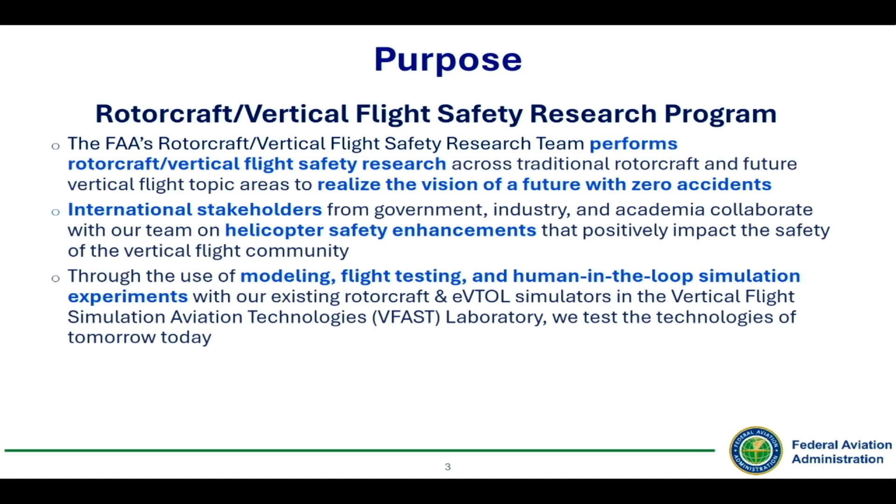We have a vertical flight simulation aviation technologies laboratory where we look at potential safety enhancements for helicopters, working with safety teams like the United States Helicopter Safety Team, the Vertical Aviation Safety Team, and a lot of the VFS working groups. We do all that with an eye toward the future, testing the technologies of tomorrow today. I know that's a little Disney-esque, but it's really the truth. It's really what we do.

This is a roadmap of the research activities we are working on within the FAA, kind of a little bit of history of some of the stuff we've done here, recent history of where we've started, where we plan to go, what we do now, and where we're going in the future.

A lot of our research work, at least since I've been involved, has focused on some of the legacy things, moving things over from the fixed wing community, such as flight data monitoring, vision systems technology, degraded visual environments, and vertiports. We did some studies both in the simulator and in real life, working with the Office of Airports to come up with standards and criteria for the engineering brief EB 105 that the FAA put out.

And sometimes when you do that testing, you find that there are changes you don't want to make. That's just as important a finding as the things you do decide to change.

That moved us into the near-term phase where we're sort of at right now, looking more at virtual reality flight simulation training devices, still doing some work on those other things, but starting to get into areas of more IFR infrastructure, so procedures. We're looking at things like IFR to the surface, as well as reducing loss of control accidents—how do we do that with better automated flight control systems, better technologies for looking at flight regimes and different things.

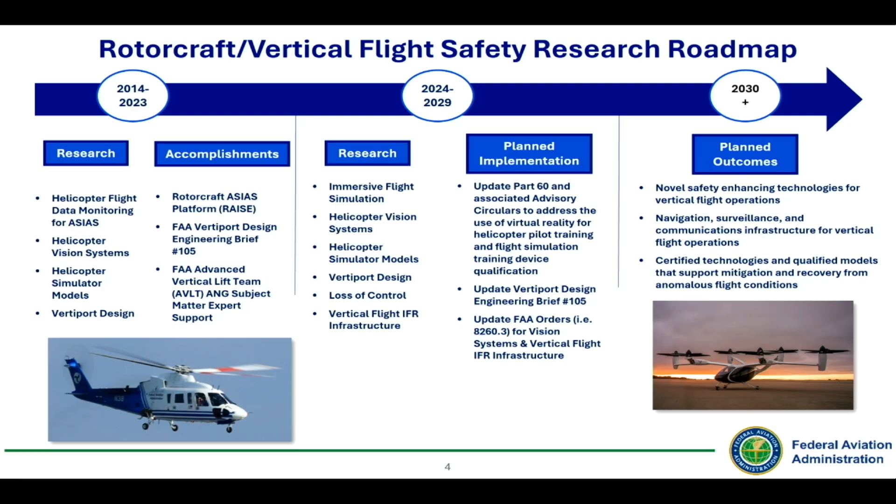Here's another way to look at this, just a sense of current and some legacy projects we've been looking at primarily. In addition to the ones I talked about before, we've also been active on wire strike avoidance, integrated flight and propulsion control, and things of that nature, as well as all the virtual reality and other things we have going on, flight data monitoring, and crash-worthy fuel tanks and other things we have going on at the center.

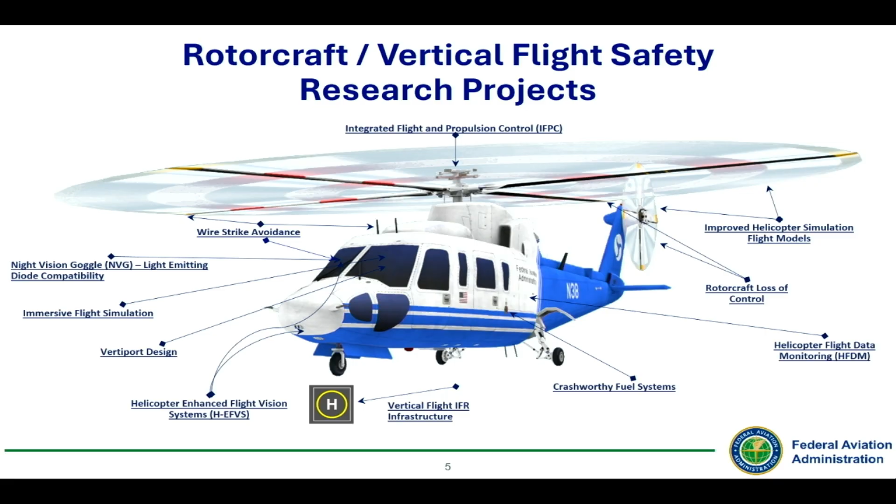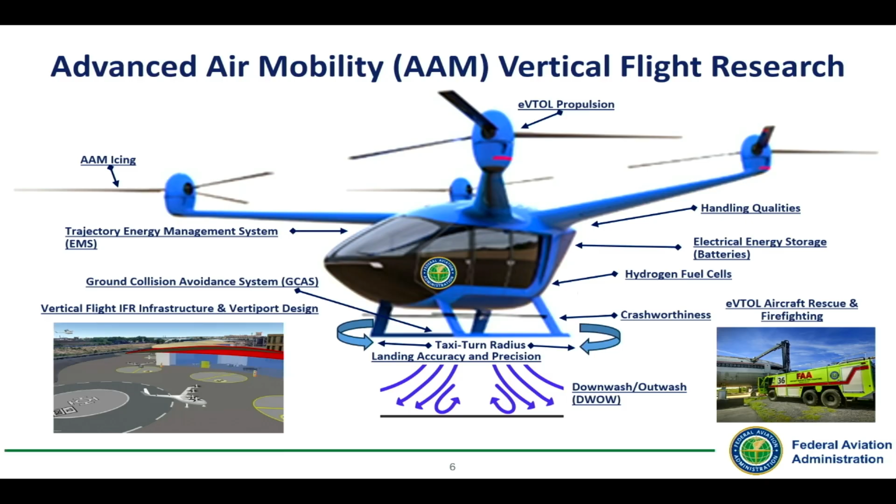On the AAM side, some of the things we've been looking at are relative to the legacy helicopter, but we've also been looking at things like downwash and outwash, landing accuracy, some icing aspects, aircraft rescue and firefighting, and the infrastructure, which is also important. I mentioned before, we don't do this alone—we do this with a number of different partners.

I want to talk briefly about this. I'm sure my colleagues on the panel will probably hit on this more than I will, but the FAA recently announced an eVTOL integration pilot program, and there were 8 sites selected.

There's a number of different sites and partnerships. You can go on the FAA's website as well as the DOT's website. There's more information on there about the EIPPs.

They're just standing up. We've done a number of different partnership programs in the past, dating back to the stuff we've done with the test sites and others. So there's a long legacy of public-private partnership and collaboration. I think this just extends it and operationalizes it as we look towards initial operating capability and the start of commercial operations with some of these platforms.

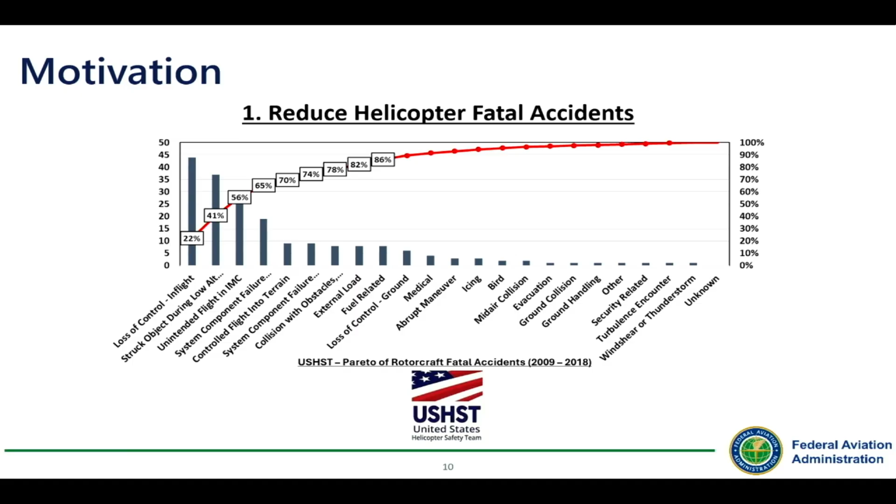Historically, we're trying to prevent helicopter fatal accidents, reducing the fatal accident rate for rotorcraft. This also extends out when we get some of the new entrants flying. We don't want to have accidents there as well. We want to continue to reduce the commercial fatal accident rate. The top 3 historically have been loss of control, unintended flight into instrument meteorological conditions, or low altitude operations. But there's a whole host of other things.

The other motivator of why we do what we do is really to look at the pilot shortage. Yes, there is a pilot shortage, and yes, it goes in waves with hiring by the airlines and different things. So people come in and they go, and everybody focuses on that.

But a lot of times, where are we pulling our pilots from? It's not just from the airlines, right? It's from people that are already flying on the helicopter side, or that may be thinking about going into the piloted version of the new platforms, until we get to some of the ones that are going to be unmanned or autonomous or remotely piloted. Where are we getting these people from? That's a huge concern and something I think we are looking at within the industry.

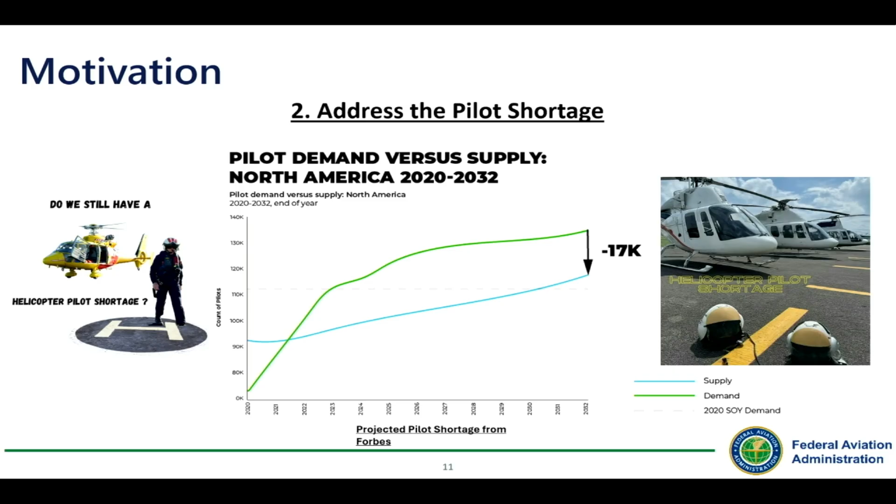So it's a question of how do we go address that, because they have to come from somewhere, and if we're taking them from certain places, what are our pipelines like? How do we improve that? How do we motivate more people to go into this industry? It all plays a role.

And then once we've got people that want to fly, how do we enhance the efficiency of the training? I started out myself on unmanned aircraft first. I learned some of the basics of flying through ground schools and different things and flying that. And then my instructor told me, hey, let's go fly. Let's take you up in a Cessna 172.

And I grew up in the video game generation. I played X-Plane, Microsoft Flight Simulator. I thought I knew what I was doing. Got in the aircraft—I didn't know what I was doing. It was completely not what I expected, but it was a great learning experience.

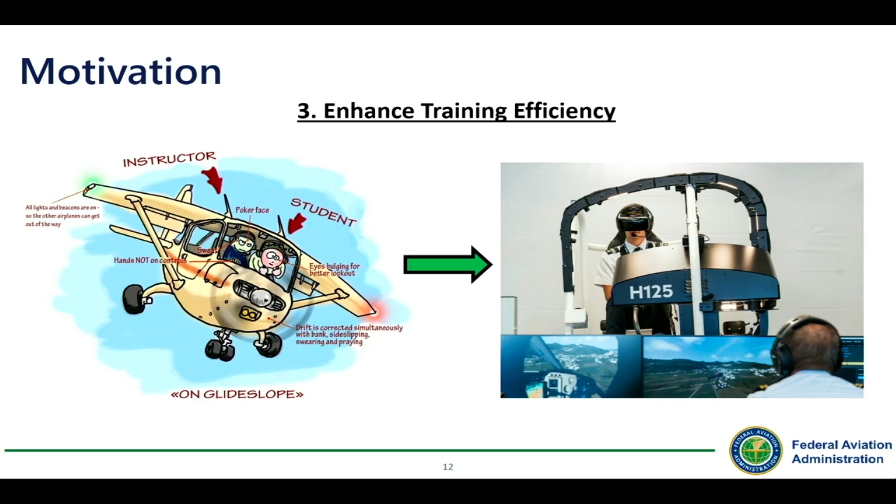But there are certainly, as I look back on my flight training, times that it was not efficient for various reasons. I learned things, but could I have learned them a little better in a different environment? I think we're getting to the point now where simulation really can help. Myself and another colleague—a plug for her work, which I'll talk about later, she has a couple presentations and papers here at the forum that we've written together—I think that's paving the way, and I think that is a path as we go forward.

So as I talk about some of the areas, I'm not going to hit on everything. I gave kind of the overview slides of some of the things, but some of the things I'd like to just highlight a little bit more are things that we are doing.

These are specific areas where we have actual agreements. We're working in this space with some partners of ours already. We'd obviously love to do more with all of you as we go forward.

So the first one is really instrument flight procedures, IFR to the surface. And our colleagues over here with Wisk—David's going to be up here talking about this soon—we have a cooperative research and development agreement. You'll hear that term a number of times.

It's just an agreement where we partner with someone from industry or academia, and we agree to share resources towards resolving a joint problem we're trying to look at in research. In this case, we're trying to look at how do we enable instrument flight procedures for powered lift, AAM, eVTOL, both on the piloted side as well as autonomous as we get to that point.

The idea behind this is, for those that are helicopter pilots familiar with point in space approaches, how do we get beyond what we do today for point in space approaches and departures and go all the way to the surface? Think of a Cat 3 ILS type approach to a runway, or a GBAS approach, a GLS approach. How do we get to that for vertical flight?

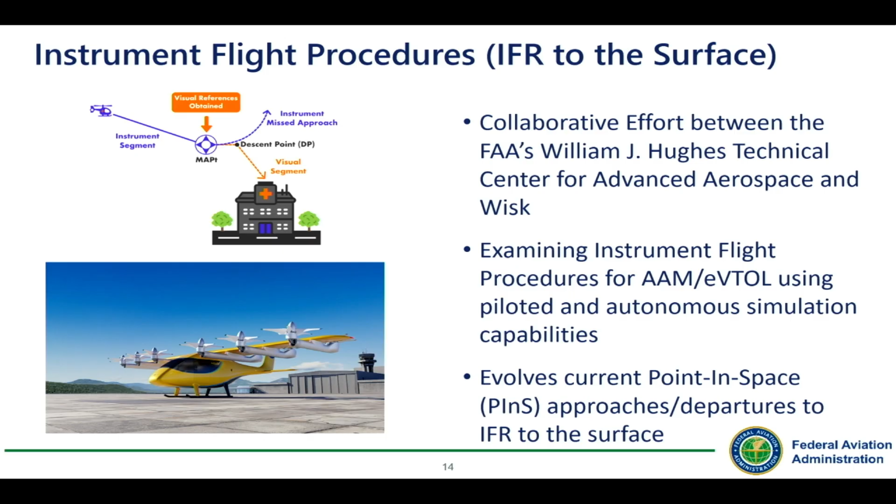We've also done a number of modeling and simulation activities using assets at the FAA William J. Hughes Technical Center. This is an overview slide showing all the different assets we have here at the center, really focused on how we advance the air traffic piece of this.

We talk a lot about the vehicle side, and I do a lot of work on that side, but how do we come up with the procedures and things for air traffic to handle these platforms? For this, we've actually partnered with both our friends at Wisk as well as Ryan, and he's going to talk a little bit about some of the stuff.

We have a CRADA that was signed with Wisk. We have a Wisk simulator at the FAA that is part of this. We run different airspace configurations, we have modeled traffic, and we also have some piloted and some autonomous traffic in there as well. We're all working towards how do we move forward with this.

This gives you a little bit of an overview. This is from a couple years ago, when we were doing the work with NASA with some of their flyers. We had tied in NASA's Langley Research Center to our environment, and that's part of our capability. We can do live, virtual, and constructive testing, and we can integrate partners from around the world for this.

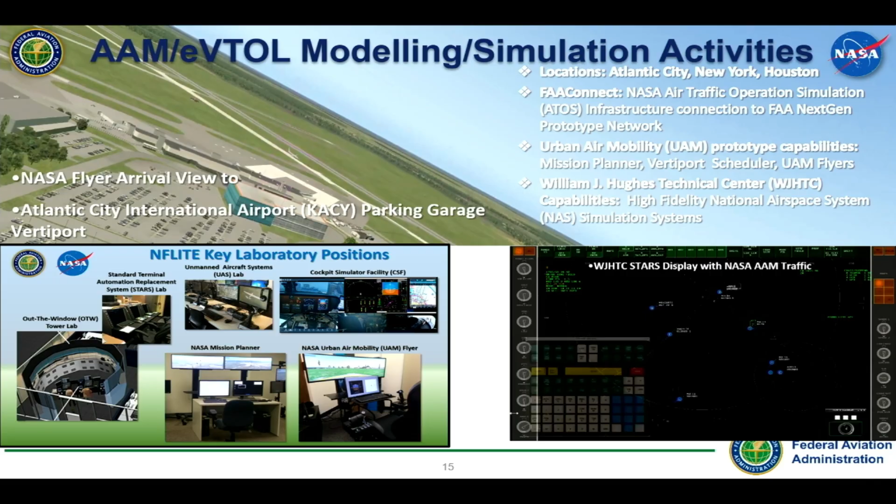This is a display just showing the AAM traffic that we have here on the STARS display. So we do all that. Beyond that, we also have been looking at extended reality, so flight deck training.

I'll talk a little bit about what we're doing with more of the motion-based simulators, but we also look at extended reality headsets, not just for pilot qualification of getting a rating or adding a rating on or doing different things, but how do we start coming up with guidance for flight deck trainers and things of that nature.

Other OEMs and other simulator companies are doing similar things. How do we get that technology and evolve it to be able to secure some credit for doing that work? That's part of our research effort as well. It's not just on the helicopter community, it's also making its way into the fixed wing community as well.

We also have a CRADA with Acme Worldwide Enterprises. They are a dynamic motion seat company, and we're working with them to look at whether there's potential for coming up with some qualification surrounding seat dynamics rather than the motion of the base of the simulator itself. They have a number of different systems around the world, primarily on the military side, and we're looking to see if we can incorporate some of that into our qualification standards and guidance as we update that for more of these immersive technologies.

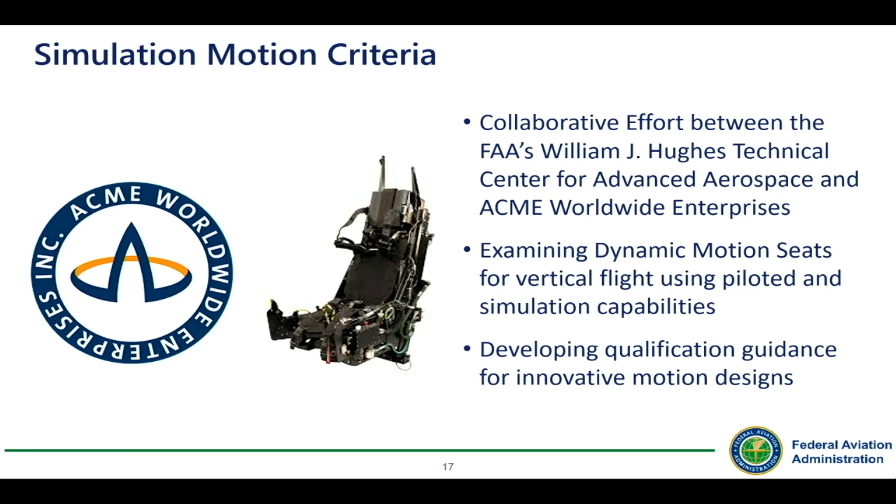That brings me to one of the bigger projects we've done, which isn't just looking at flight deck and procedures trainers, but how do we actually enhance pilot training with virtual reality flight simulation.

There are 3 companies in the world today within the U.S. with different qualification standards from EASA: Loft Dynamics, TRU Simulation, and our friends here at Leonardo. They've all, within the past 2 years, acquired level 7 qualification from the FAA on their virtual reality flight devices - Loft's the H125, TRU's Bell 505, and Leonardo's AW119.

We were involved in aspects of the qualification of each device, either at the qualification events or events leading up to them. My team helped the simulation engineers within the FAA understand what virtual reality is and how to look at different things.

The reason this is important is that the newer devices are more affordable, more accessible, more compact, and more immersive than legacy devices, as we all know. We've qualified these with a new generation, and they have reduced motion platforms as well.

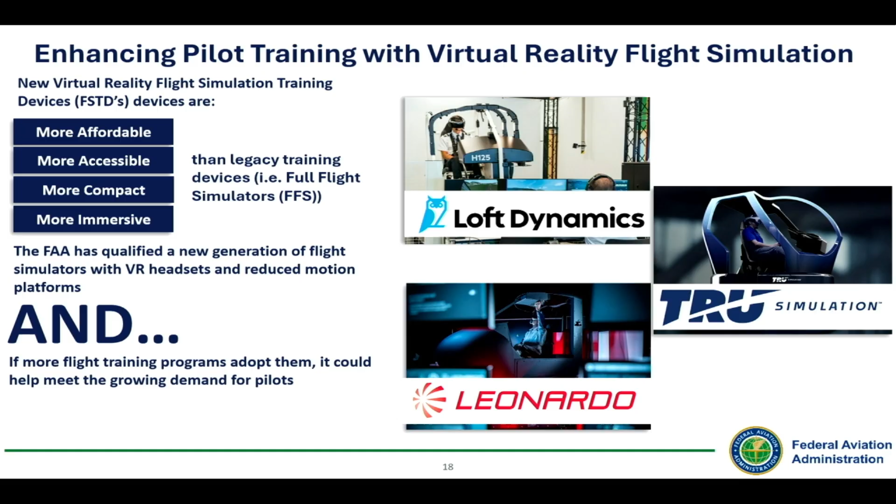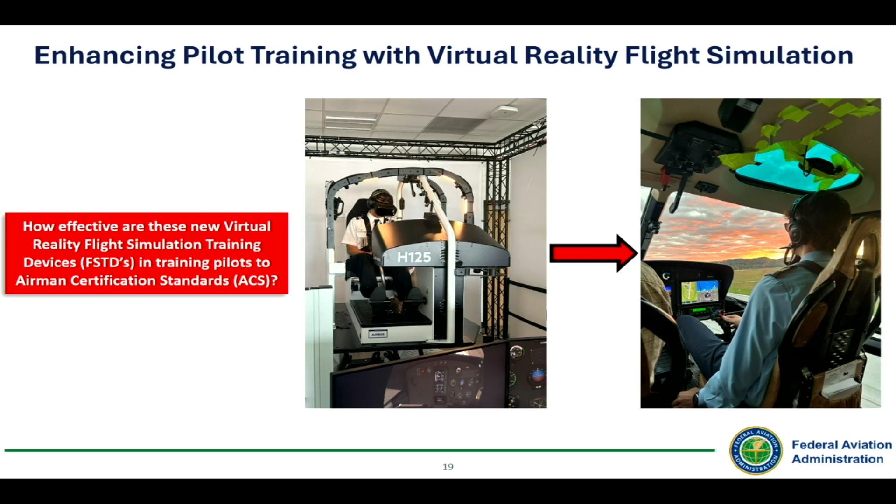Additionally, if more flight programs adopt them, it could solve the pilot training shortage that I mentioned earlier. But there's always a but, right? How effective are these devices really in training pilots to meet airman certification standards, the ACS that we have within the FAA?

So what we did is we partnered last year with Marshall University and Loft Dynamics, and we executed a study. If you want to find out more details, I highly encourage you - we have 2 papers being presented by a colleague of mine, Dr. Eleni Soteropoulos, about the FAA VR HeliStart project here at the forum.

They're both in the modeling and sim session, I think - you can look them up on your schedule. One is this afternoon on hovering maneuvers, the other is later this morning covering the overview, methodology, and overall results.

We did this whole study with a group of folks, taking students through simulation and then putting them in the actual helicopter for a few flights for their stage checks. We evaluated their skill level in terms of meeting ACS standards for commercial helicopter pilots, both in the simulator and in the actual helicopter.

So all that said, that's kind of the projects we're doing. I want to spend a moment talking about some of our laboratory capabilities, and all of these have been done really through collaboration and partnership.

I won't talk about everything, but some of the things I mentioned for the modeling and sim we're doing for AAM at the center involve our target generation facility and our cockpit simulator facility. We have a number of simulators at the FAA, everything from transport category fixed wing to general aviation platforms to rotorcraft to some VTOL powered lift and unmanned aircraft simulators as well.

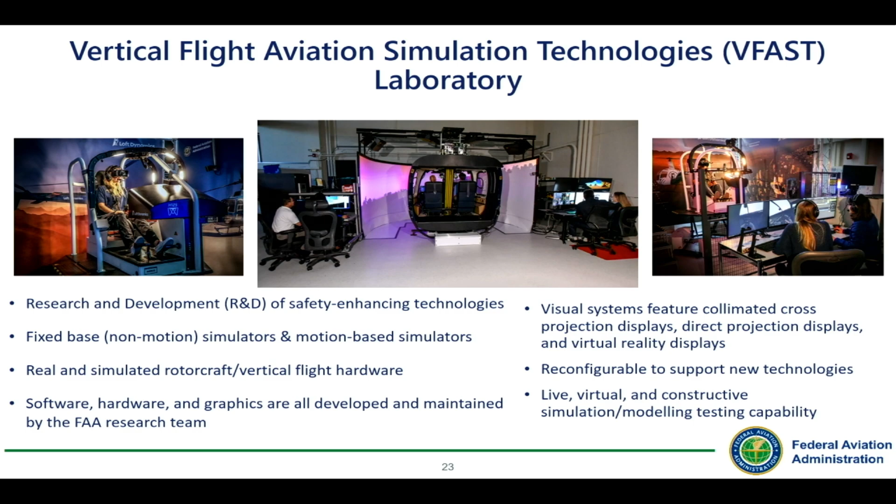As far as flight simulators go right now, we have the following: a Bell 407, a few of the Loft simulators - the 125, R22 - and our S76D simulator as well. And we've been putting together a Guimbal Cabri G2, to follow on the one that myself and some of my colleagues have been going through on our flight training.

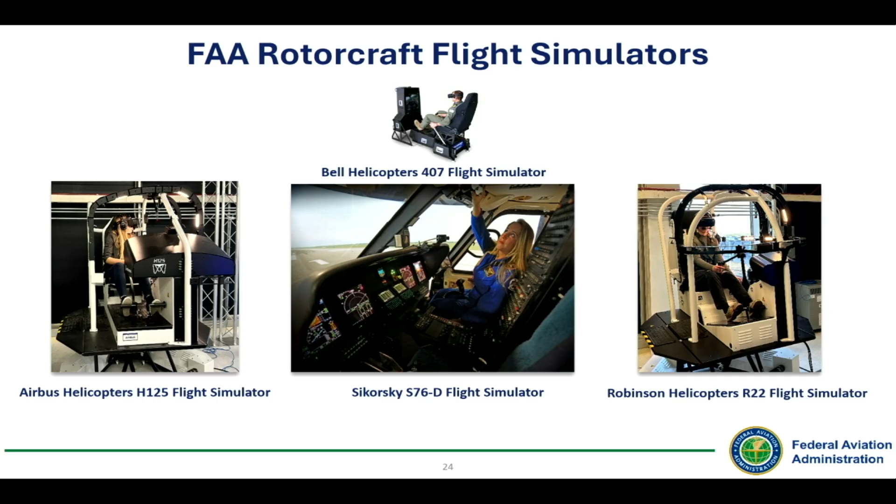We also have some VTOL platforms that I mentioned. We do have a research vertiport, originally a research heliport. It's one of only five that I'm aware of in the world with the capability to do the instrument criteria as it exists today, and we are looking at modifying that criteria. We have the precision approach lighting system, the HALS, the helicopter heliport approach light system, the PAPIs, CHAPIs, and different things out there. We've done a number of test operations there. It's all instrumented with weather platforms, weather sensors, an RVR sensor, cameras, and different things. I've used it historically for a lot of my vertical flight research when we've done flight testing on vision systems, flight data monitoring, or pick a project we've done.

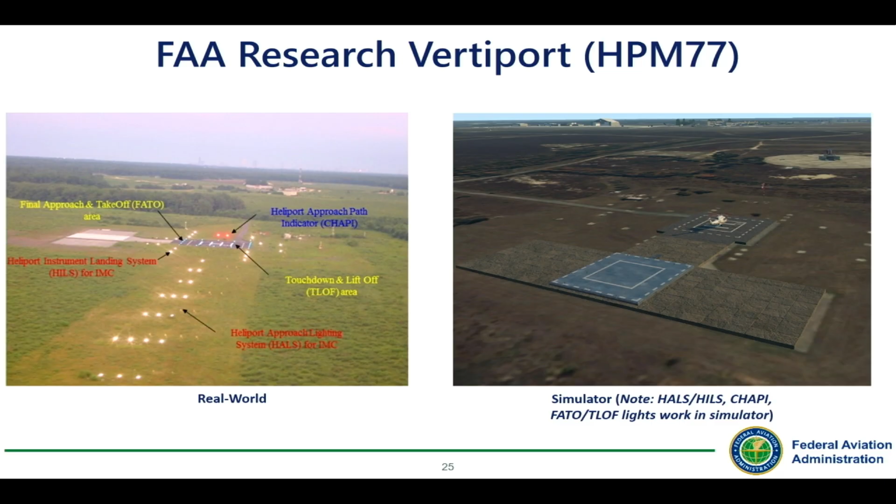So that is there. So where's this all going? What are we trying to accomplish here? I want to talk a little bit about the research outcomes and the impacts, and why we're doing what we are doing, why it's important.

On the pilot training side, there is definitely room for updates to Part 61, as well as the FAA announced modernization effort of Part 141, some of which is geared towards giving more examining authority to some of the schools. But that also plays into our research, which is how do we start incorporating more of these newer, next generation virtual reality type platforms into a 141 training program? How do we provide for additional credit? It's one thing to get the device qualified. It's another thing to be able to use it and say, I'm going to do X number of hours on the platform.

It also looks at, as we come up with new things, either through the powered lift SFAR or through the work we're doing right now, how do we update the ACS? What has to be done? The helicopter flying handbook—having just gone through my helicopter training, there's some sections that are kind of confusing, that are in conflict with one another. We could do a little bit better, and we will do better. So how do we update that?

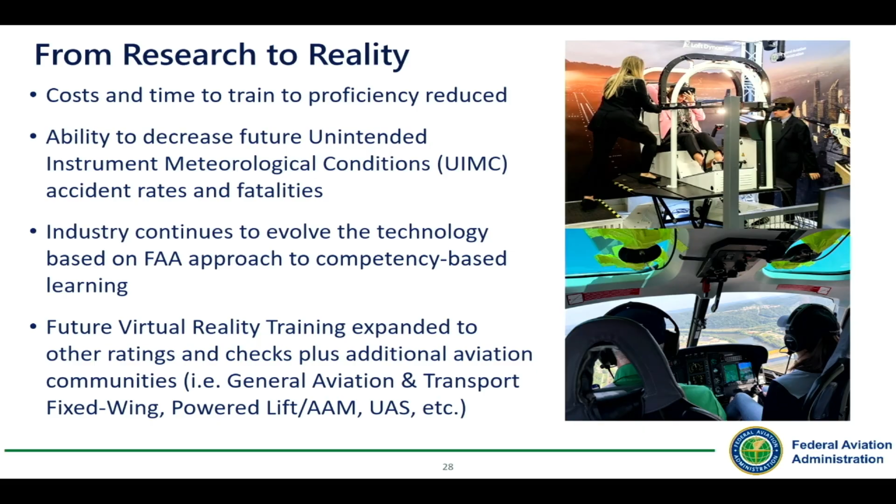Can we evolve it so it's not pure qualification of devices to prescriptive standards? How do we go to more performance-based? How do we look at competency-based learning and other types of things?

Again, just another little shameless plug for our work, but it was a really good issue of the FAA Safety Briefing magazine. This is online—there were some hard copies available at Verticon if anyone grabbed them—but there were a number of really good safety articles about the work the FAA and others are doing within the community. I was honored that they reached out to us and wrote an article on the project we were doing, called A Virtual Approach to the Real Future, and it talks about what we are doing on the flight simulation piece of the virtual reality. Again, for more detail, you can talk to me—I encourage you to see Elaine's presentations. However, there's also an article if you want the Cliff's Notes version of it, but not from Cliff.

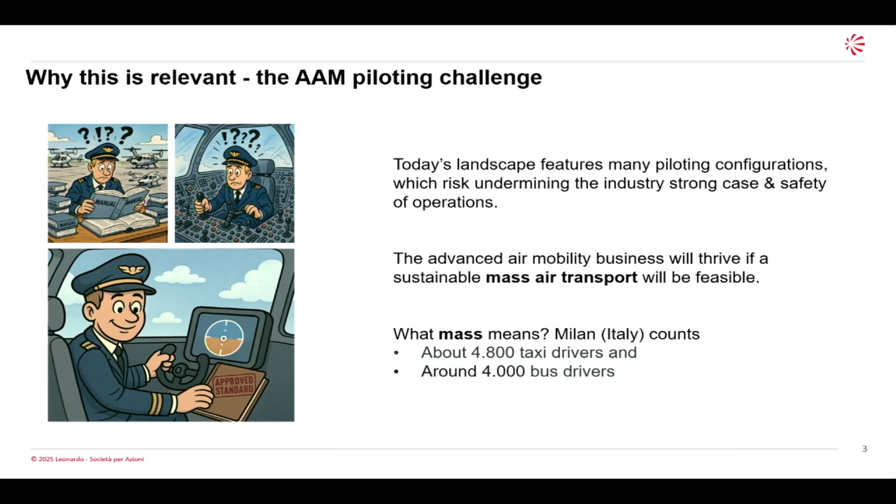Now, if you look at the experiences we have in aviation today, we don't have such a great reputation, frankly. The most successful example is, if you think about airliners, you've got Airbus and Boeing and so on, just to give you an idea. Many people flying on these vehicles, but no standards, frankly, not enough standards. So, okay, as a solution, but how costly is it to basically get the currency, to get the transition from one to another.

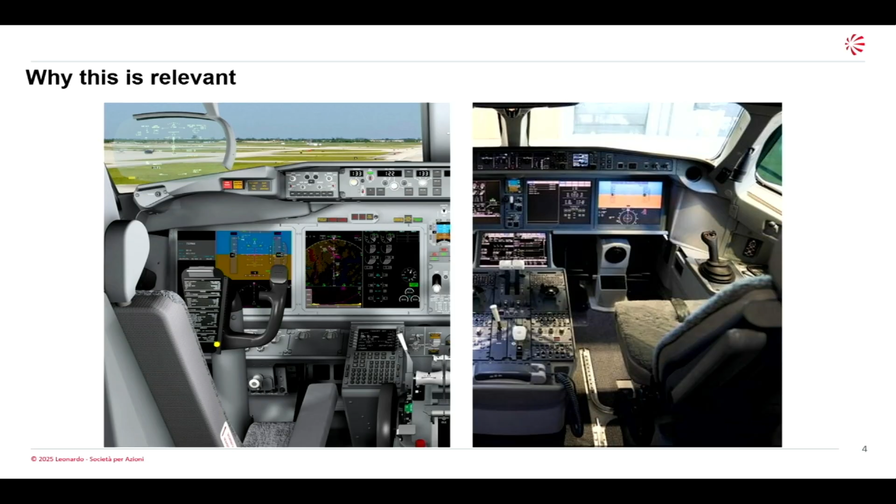And by the way, that applies also to our helicopters when we need to move from one type to another. So the problem is not okay today, and the solutions provided by industry are not serving the cause of big volumes, to be frank. The cost proposition that Cliff was hinting at is there.

To be frank, okay for the first, but not okay for volumes, because as a matter of fact, it's the sum of two vehicles. It's not exactly the recipe. We're talking about vehicles that are different from each other, that require an enhanced vehicle to help the piloting. You're not going to direct pilot these vehicles, not even on the 609, but even more so on the AAM. You need standards that don't require the combined level of skills of an airplane pilot and a helicopter pilot.

Otherwise, the result will be unaffordable. If you think about 50 flight hours to get a license, it's not going to work out very well. So that's why we were simply saying, in this case, we have the luxury of not being competitors or OEMs in the AAM. So why don't we help the community? The intent was to help the community, exactly as Cliff does with the FAA at the moment. We were basically doing the same approach. So we gave a first cut on what we could offer as a way to get to a standard for piloting. That was our intent.

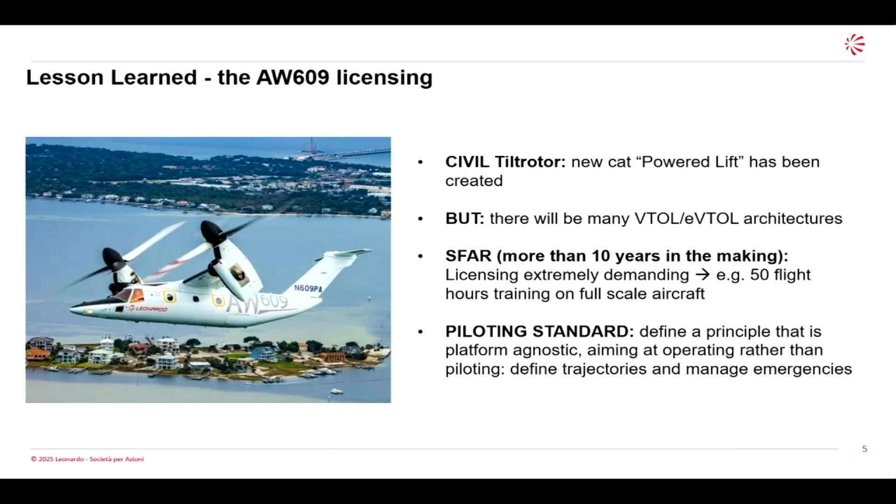So it's obvious that as an OEM, we see multiple areas of advantage. But think that this time, we're not talking in the interest of Leonardo. We're talking about the interest of the community, to create a new paradigm and a new kind of means of transportation. We have mass transportation wired in our brain, okay? That's the intent. So the point we were trying to make was how can we help in creating something like that? So we went with methods. We gave a first cut on how we do it. So the whole thing was on the how, okay?

So that's when I passed the ball to Emanuele Bianchi. Imagine that within Leonardo we have a group of people doing preliminary design, general architecture, and HMI. We wanted a group led by Emanuele's team to give their idea on a first cut and call others to participate. We're happy there was a good response, and I'm happy that Joby also came to visit us. But the intent is to help the community. That's what it is. So I pass the ball to Emanuele.

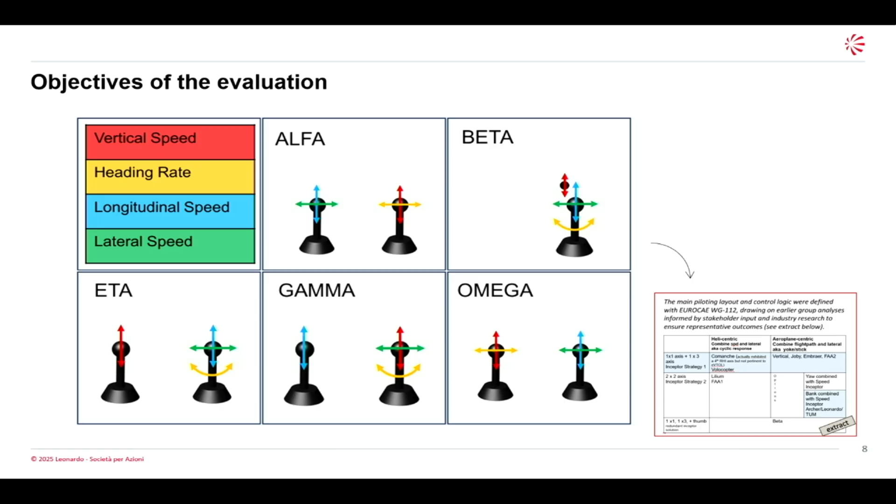During those test card executions or familiarizations, many data were collected, both subjective and objective, based on the evaluation framework that we will see in a minute. Then interviews were performed at the end of each test for each pilot, in order to collect specific information about the configuration tested, and then a comparative debrief was asked to the pilot at the end of the entire cycle in order to create a kind of score table for each configuration.

Consider that the test protocol was really the main focus of the research, because we tried to apply a human-centered approach and tried to be impartial, to filter any kind of external factor that could lead to results that were not fully pertinent.

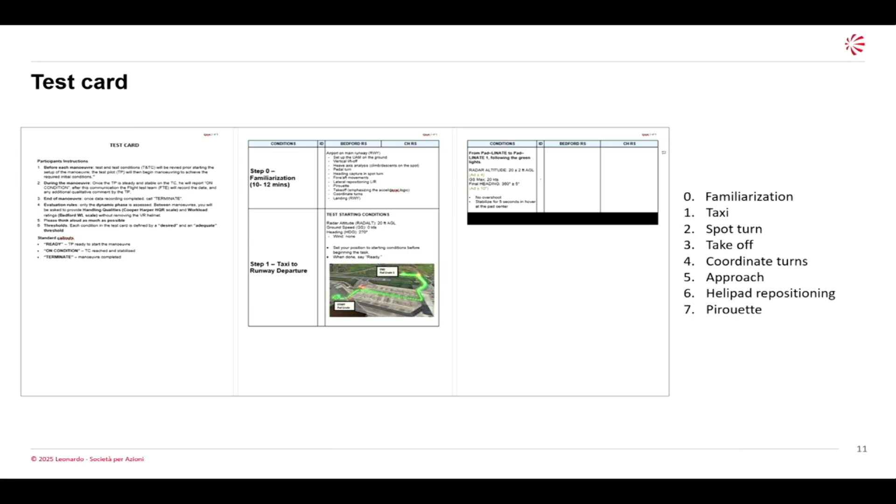The setup was really the core of the research. There was a team composed of a test conductor, some observers, and 3 technicians in order to collect all the data for each pilot. There was a hardware setup based on this kinematic simulator.

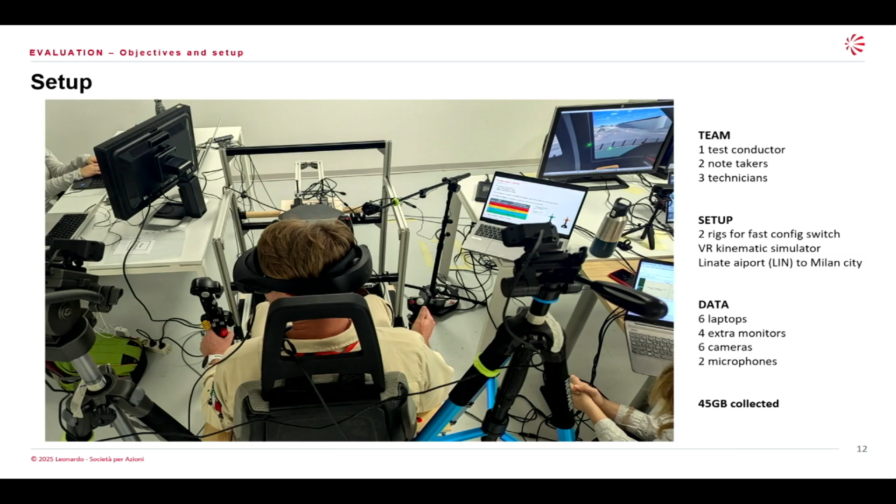There were many data collectors that allowed us to collect video, microphone, and telemetry from each of the real flight tests performed on the simulator. We collected about 83 hours of video, plus 45 gigabytes of data, which was of course analyzed together with all the other tests we performed as part of the data collection.

Data collection was based on 3 main kinds of data. The first is subjective quantitative data, which involves asking the pilot, for each maneuver, to compile a Bedford scale and a Cooper-Harper scale, and then for each configuration to answer an ease-of-use scale and other scales like adequacy, intuitiveness, and system usability. Those numbers were recorded by our note taker.

The second bunch of data was the subjective qualitative data, mainly the think-aloud approach for each maneuver, asking the pilot to comment, which was recorded and then analyzed, as well as to express reasoning for any issue at the end of each maneuver.

Finally, there was the objective quantitative data, which comes from the telemetry that created all this giga data, which was analyzed. With these three types of data, we were able to respond to the what, why, and how for each configuration, and to compare the results.

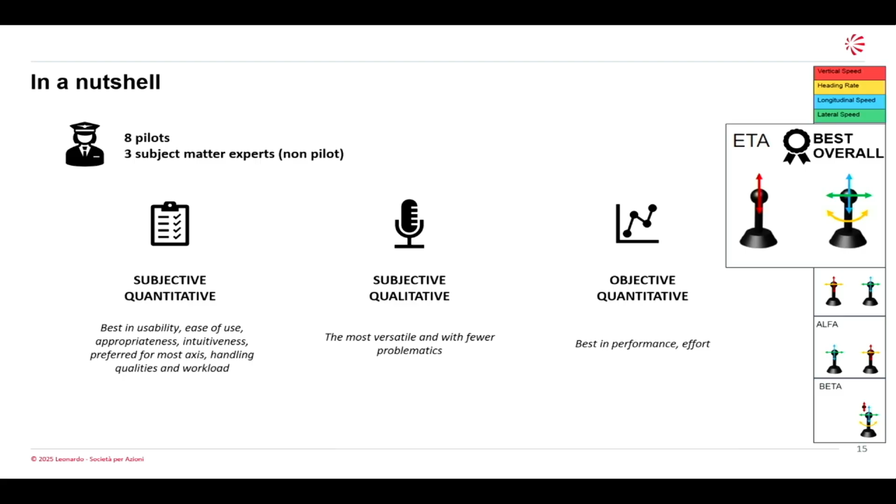But what we really appreciate is that overall the results were consistent across the different types of data collected, showing basically ETA as the most balanced configuration within all tested configurations. All the bunch of data - qualitative subjective, quantitative subjective, and objective quantitative - arrive at the same conclusion.

In this case, you can see the subjective quantitative results that highlight that the pilot preference is ETA. We have both fixed and rotor background pilots that converge to the same solution. Also, this preference is not depending on previous experience with similar platforms. Therefore, there is another aspect that was not influenced.

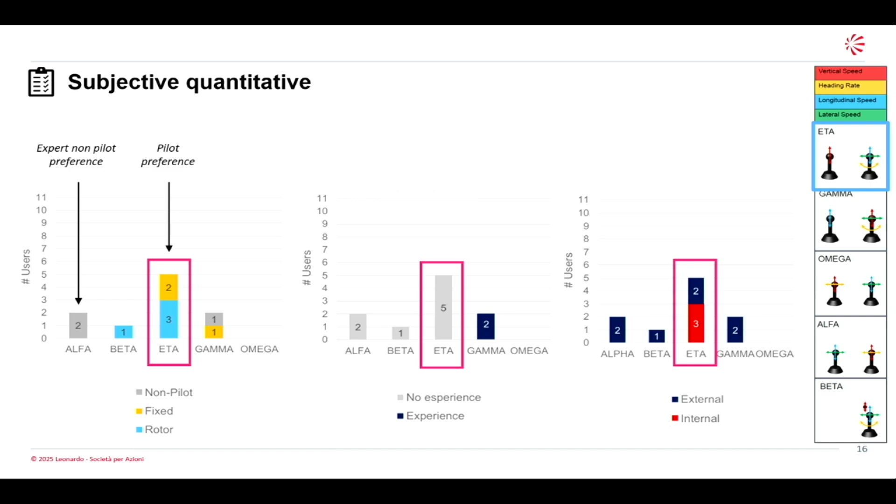The results were highlighted in this case. I think the other important analysis in the subjective quantitative analysis was, of course, to understand the different scale of ease of use, appropriateness, and intuitiveness. In all cases, you can see that ETA received the better score.

Even if in terms of absolute value it's not the best, not something we could say is optimal. For sure, there might be improvements we can apply, because overall the number is not at a very high level as you would like to receive as a score.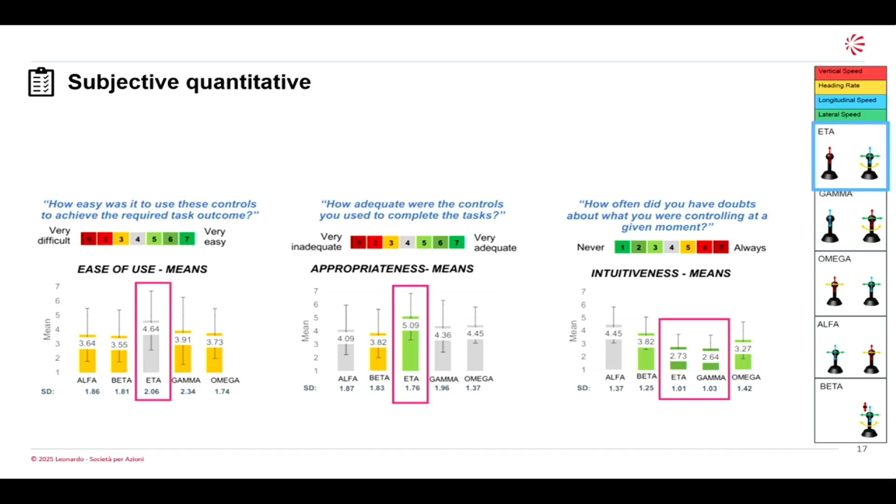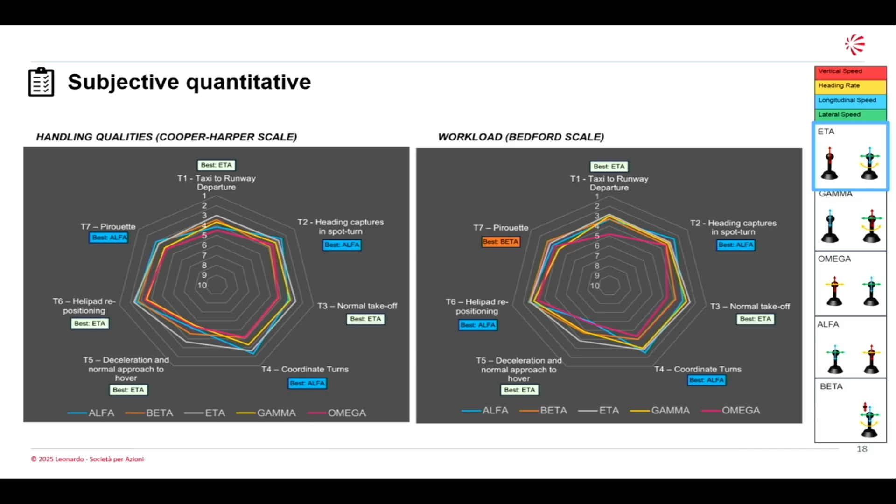The other analysis based on subjective quantitative data, the Bedford scale and the Cooper-Harper scale, again had a similar trend, where ETA was the best or the second best for each of these evaluations. In this radar plot, you can see that the ETA curve is almost always at the maximum of each score, for each axis, and therefore for each maneuver.

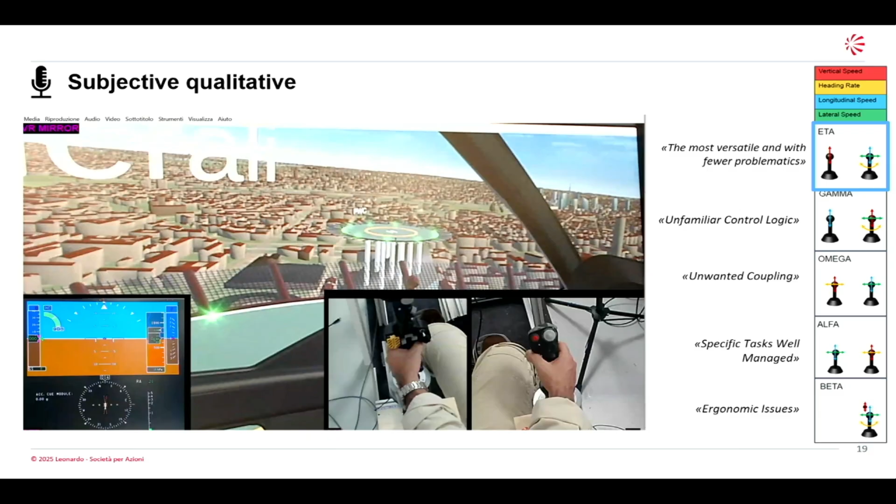The subjective qualitative feedback was also very important to analyze because you can collect important feedback from the pilots that gives you hints and insight about the HMI aspects. In this case, there was some highlighting of ergonomic issues due to the twist of the wrist, or other problems in controlling vertical speed in some cases, or unwanted coupling in other cases. So these were also recorded as part of the evaluation.

Finally, the analysis of the data done as a post-process by our team highlighted that the performance recorded by the simulator was in agreement with the evaluation that the pilots gave us. Therefore, we have good consistency between telemetry and the data we collected from the pilot itself.

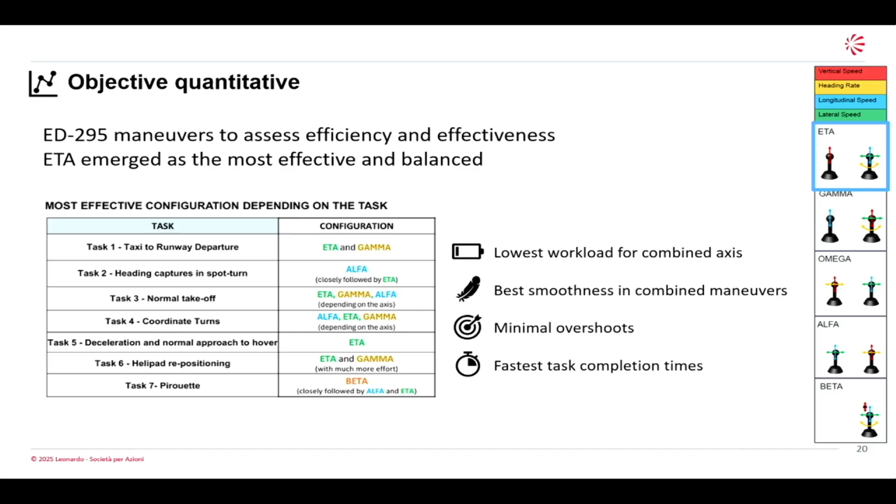At the end of this research, we also found some limitations and some steps forward we need to introduce. For example, there is high variability and no uniform consensus due to the sample limitation - this was for sure a big problem. The statistics can only be descriptive statistics and not real statistics. And there is for sure some influence of previous experience, even though we tried to filter this.

There is for sure a problem related to hardware heterogeneity. We used gaming side sticks, not really sophisticated hardware, which somehow can have an impact on the evaluation, along with the sample limitation. The statistics were another problem.

I think also the test matrix, the test card, was very long for each pilot. We asked for about 7 hours of continuous testing, so it was really very stressful for the pilot to perform the entire test card, and therefore that can, in some cases, influence the data, even though we used randomization of the test procedure in order to avoid any kind of fatigue or order effect for each pilot.

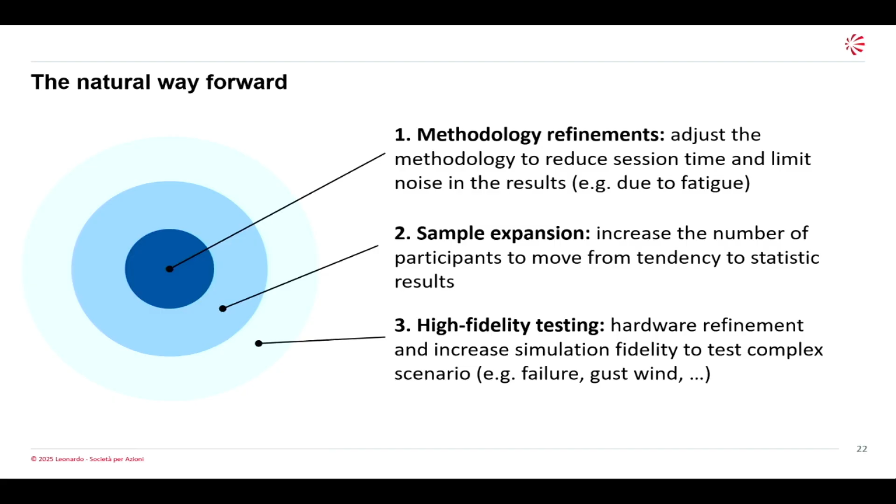And so, as Matteo mentioned, Leonardo is calling for a pilot standard phase 2, fostering collaboration within the industry, because for the future sharing of knowledge and resources, we really appreciate the work done with Polytechnic of Milan, Vertical, Joby, Embraer, and also with the collaboration of FAA and all the other partners, and we foster this further collaboration for the future. Thank you very much.

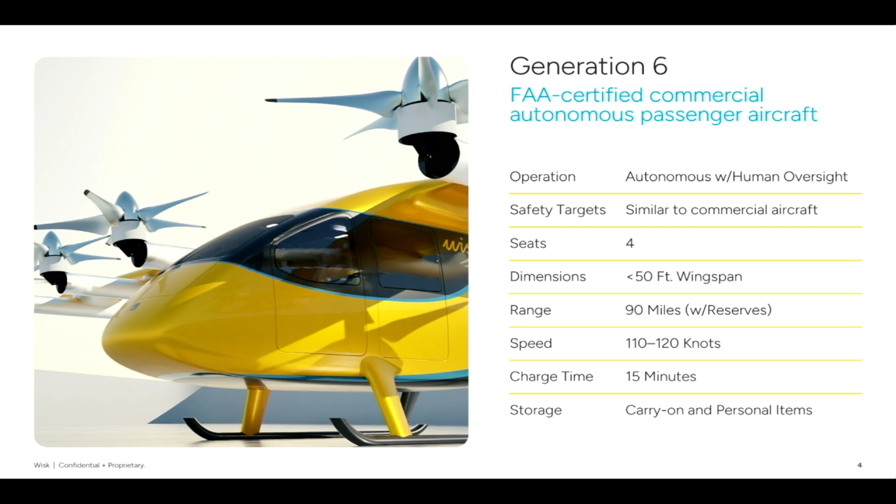Why autonomy, though? A lot of people say, well, you're just going straight to autonomy because you want to get the pilots out of it. I can assure you that we will have more crew involved in our aircraft than probably a single pilot 135 operation, and that's key — we need to have that human oversight.

Pilots do what they do very well. I think Cliff highlighted the Pareto chart they did for US HST. I had the privilege to lead the first two working groups under the Loss of Control working group under the General Aviation Joint Steering Committee, and if you look at the causal accidents, yeah, by far and away, 40 to 50% of the accidents are loss of control.

And then you have controlled flight into terrain, and system component failure or power plant or engine failure. By going straight to autonomy, we have an opportunity to eliminate those causes of accidents. With autonomy, the aircraft will not lose control. We'll have multiple layers of safety, and we will have a commercial level of safety baked into this aircraft.

And the aircraft is designed from day one around that. It's not like we're bolting autonomy onto a piloted operation, where when the autonomy fails, it's the pilot that saves the day. The autonomy will always be there, the systems will always be there to intervene. But even if everything does fail, we still have that human pilot in the loop, or over the loop, who can intervene.

So safety is first and foremost, but also scalability. If we really truly want this to be for the masses, how do we get there? I think it's through autonomy. So safety, scalability, but also economics. And I think with economics, the mission of Wisk is safe, first and foremost, but everyday flight for everyone.

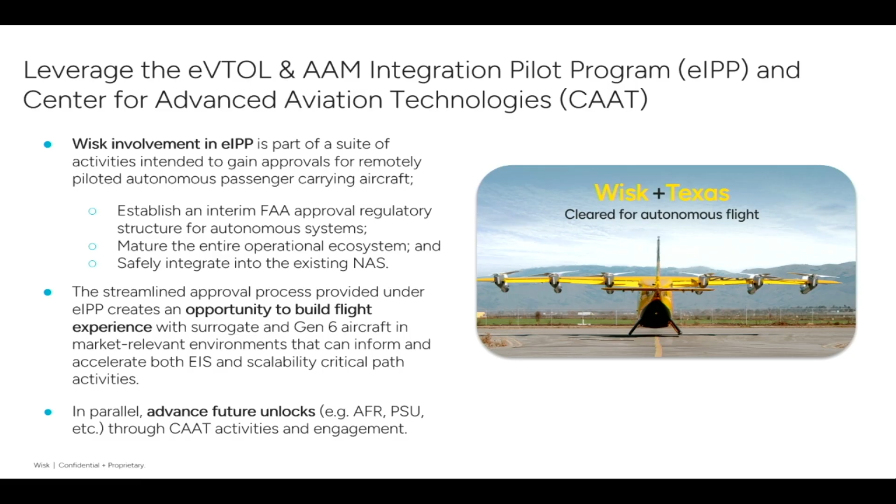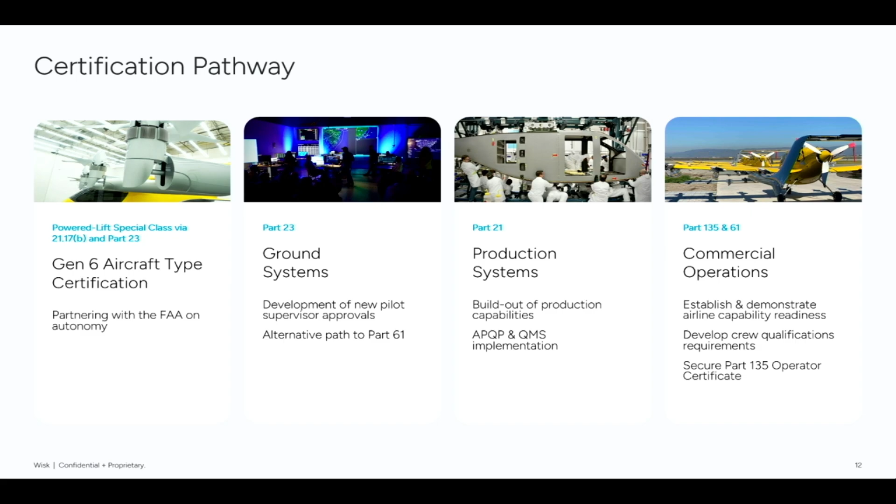But we need clear and defined pathways for not only certification of the aircraft, but also the operations. We're definitely going to leverage existing frameworks and rules that work today. But there are gaps, and we know there are gaps. The FAA has identified those gaps for us, which was great.

We worked through another association called the General Aviation Manufacturers Association, or GAMA, where the FAA held a number of workshops last year. They sat down with us and our partners and worked through the gaps around current regulatory structures and policies that would unlock and enable autonomy, autonomous operations, workforce, infrastructure, and airworthiness. There are a number of them.

At one point there was talk of standing up an aviation rulemaking committee, which I've been part of, and maybe several of you have too. ARCs are fantastic, and ARAC is fantastic as well, but those are venues where we all just sit around a table and discuss. If we now have an opportunity through EIPP to actually go operate and inform these gaps through real operation and actual data, that's a gold mine, and we intend to take full advantage of it.

Pilot workforce—real quick on that. Over the last 12 years, one of the things I've been involved in is leading the FAA's Aviation Rulemaking Advisory Committee, and under it, its Airman Certification System Working Group.

Cliff mentioned the ACS—we had a big effort, when they decided to go 21.17(b) and enable powered lift for not only Leonardo but also advanced air mobility, to get the standards and guidance in place. We worked hard to get those up and running, so those are out, but to Cliff's point and Leonardo's as well, they probably need a little refinement.

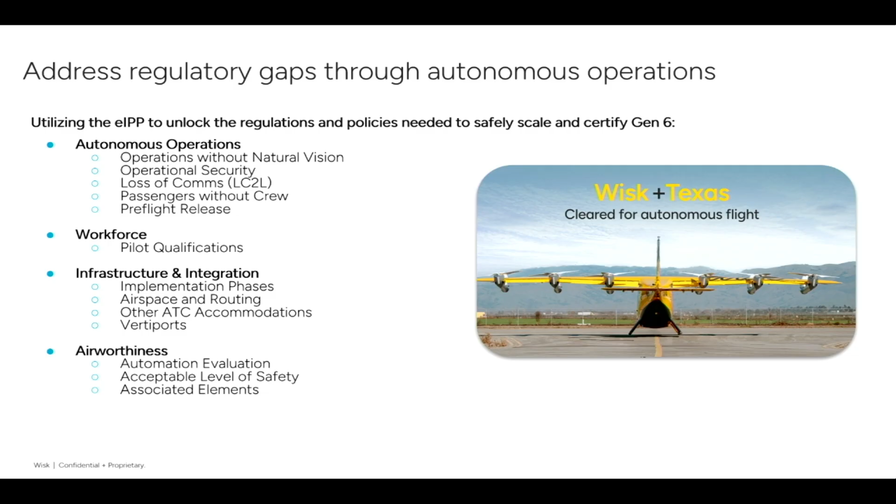But if we have an opportunity in the future to define a new standard, a new certification under Part 61, maybe leveraging what we've done with small UAS and up-leveling that, we could clearly define what a person needs to know, consider, and do to be one of our operators in an autonomous operation. That's really the opportunity, and I think we should take advantage of it.

To wrap up, a couple weeks ago we had the Modernizing Aviation Summit at DOT headquarters, where the secretary presented some of what they're working on, the brand new air traffic control system and modernizing our air traffic services, which is a great opportunity.

It's funny, because a lot of the issues they're working to solve have been known for so long, yet we never had an administration that really leaned in and got the funding needed to enable that. Now they have the funding, not all of it, but a good down payment, and they're working hard to get that system in place.

But in order to take full advantage of that new, modern, digitized system, we need to couple that with a new set of flight rules. Today's flight rules have been developed over decades. IFR routes were designed around light beacons, even fire pits, to really identify the Victor Airways.

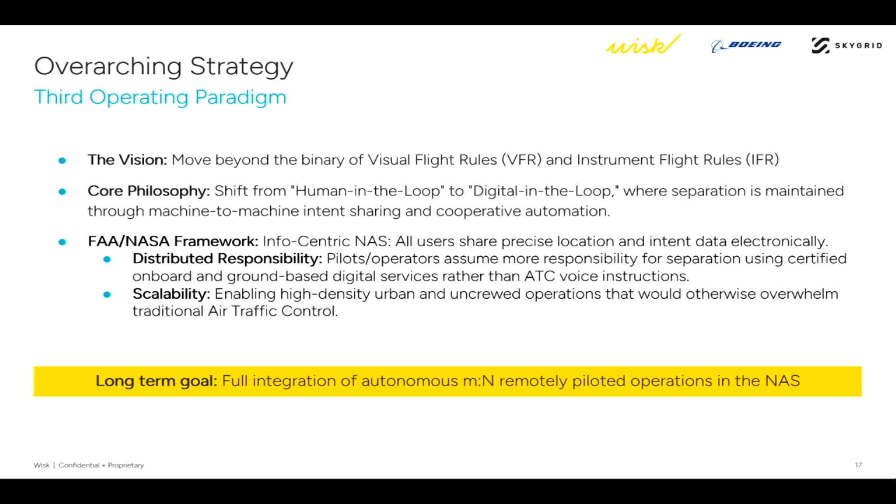So the long-term goal is obviously to fully integrate autonomous operations, but not only one-to-one, also one-to-many, to really get to that price point and safe point that allows this operation to truly be for everyone. Appreciate the time, look forward to the conversation after, but thanks for the time.